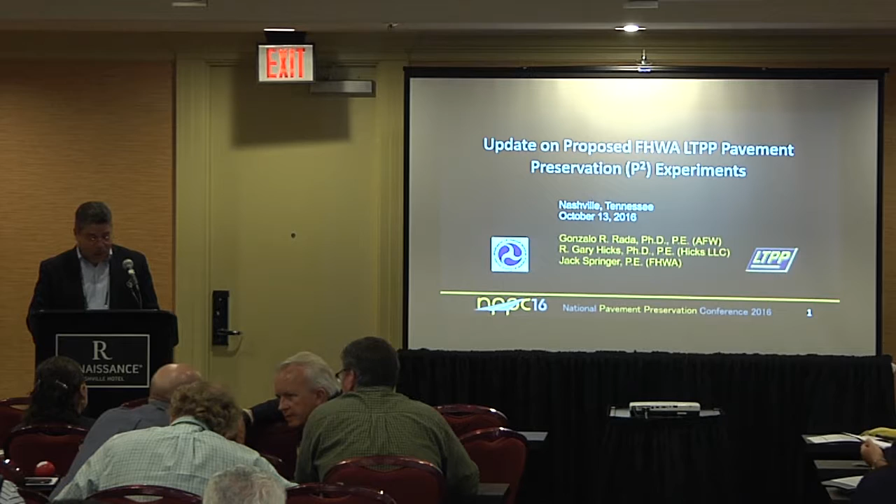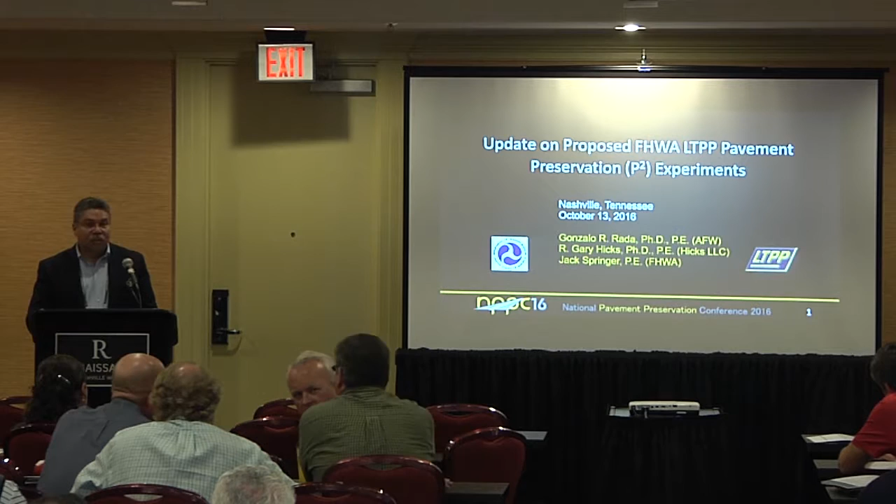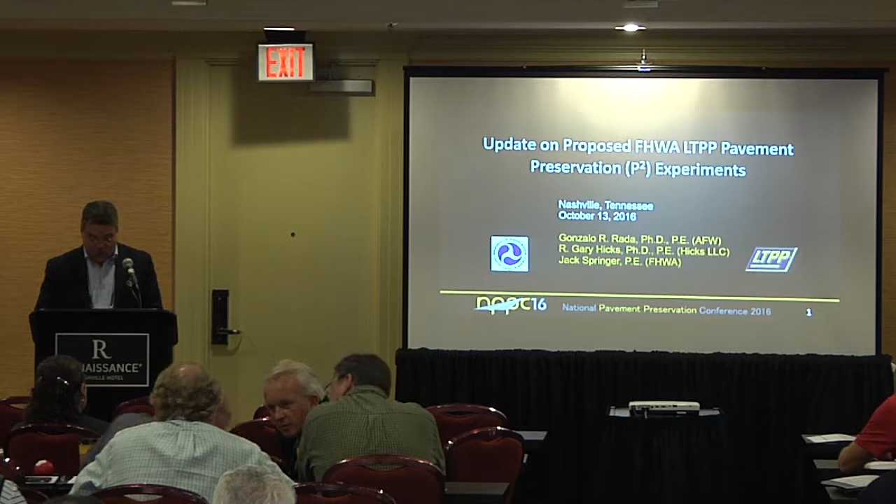The Federal Highway Administration is in the process of developing a series of experiments that will also evaluate the performance of different pavement preservation treatments. To give us an update on the status of these experiments, we have Dr. Gonzalo Rada from Amec Foster Wheeler. Gonzalo is a senior principal engineer with that consulting firm. He has served as principal investigator on numerous pavement research projects, including 3 ongoing pavement preservation studies, one NCHRP project 1433 that deals with pavement performance measures that consider the contributions of preservation treatments. There's another NCHRP project 1438 that is a guide for timing of asphalt surface pavement preservation, and the study with Federal Highways that is for the design of the pavement preservation experiments for the long-term pavement performance program. That is basically the topic of his presentation. So with that, please welcome Gonzalo.

Yeah, that works. Thank you, Luis, and a very good afternoon. Sorry, I'm being too loud. Very good afternoon to all of you. It's a real pleasure for me to be here at this conference to give this presentation on the LTPP pavement preservation experiments.

Before I get going with the presentation, I would like to acknowledge a couple of key project members who helped put together this presentation. First one is Gary Hicks. I believe most of you know him quite well. I think he's playing hooky this afternoon, so I was hoping he would be here to help out, but obviously not. And then Jack Springer, whom I also believe you know quite well. He is here to help out, so thank you, Jack. I also want to acknowledge and very much thank the members of the expert task group that were set up for this project. They have basically been providing us guidance from the start. They've reviewed and commented on everything that we've produced. A number of the members are here, Ben, Jim Moulthrop back there. Am I missing anybody else? Anyways, we've had a really good group of experts helping out along the way.

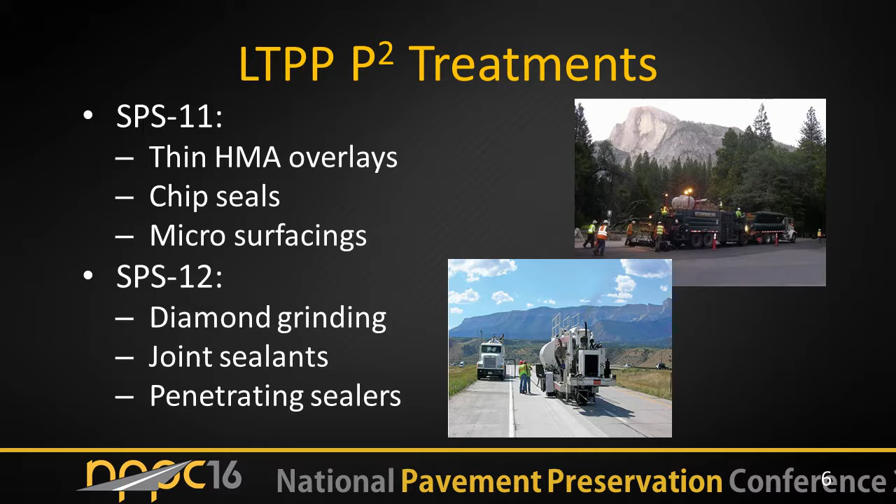So we have a control section, which is very critical for many reasons, but then we apply the treatment at year 0. Year zero means when the project is implemented within the LTPP program. Then 2 years later, you do the exact same treatment on a different section. 4 years after the project goes into LTPP, another section with the exact same treatment.

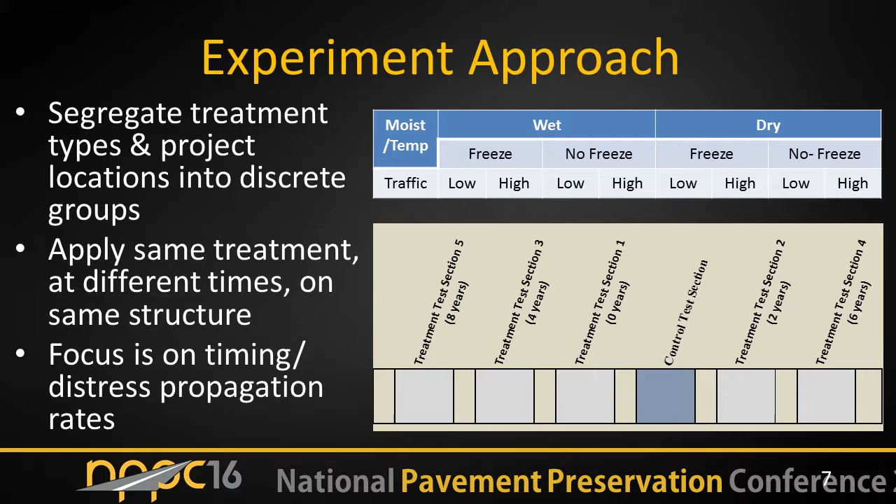So in essence, we're applying the same treatment, not at the same time, but at year 0, 2, 4, 6, 8. That's sort of what we like to do, but that obviously is going to depend on the distress propagation rates. If they're high, we can reduce the timing; if it's slow, we can open up the spacing. The idea is that we're really focusing on timing relative to the distress propagation rates, and we feel that information would certainly complement, perhaps supplement, a lot of the work being done in studies like NCAT and MnROAD.

So that's a bit of an overview of the experimental design. In terms of deployment, basically the first element is construction of the test sections, and here there are a number of elements that were put in place. A set of nomination guidelines were developed to basically help with the nomination and acceptance process.

Those guidelines contain agency participation requirements, which I'll detail in the next slide. They have selection criteria, which I didn't talk about in the experimental design. Perhaps I should have, but we're really being a little bit narrow on what we're considering.

In the case of the asphalt preservation, the only pavement family we're looking at is asphalt overlays over existing asphalt pavements that are in good condition, that are fairly new, the overlay. In the case of concrete pavements, we're looking at doweled jointed pavements. So those are the sorts of things we have under the selection criteria.

And then, of course, we have nomination forms that the regional support contractors will help the agency complete and move along the entire process.

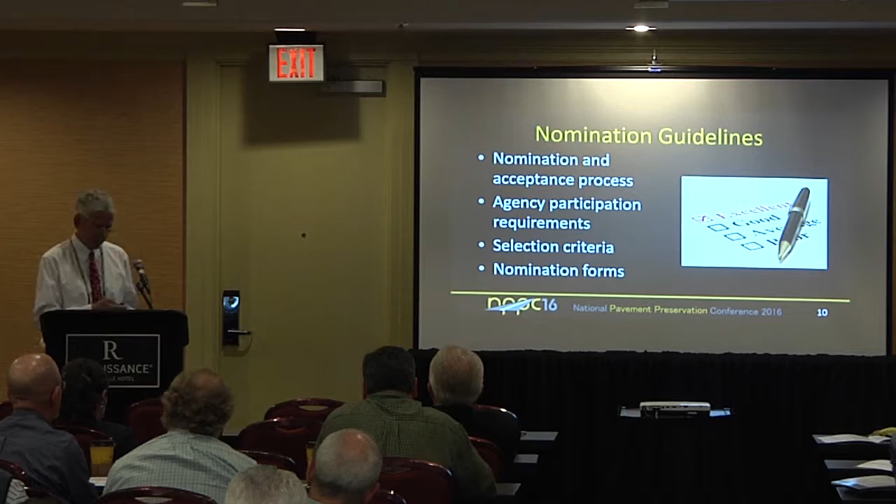Here's a quick summary of the agency participation requirements. These are basically exactly the same things that the state DOTs are doing right now in support of the LTPP program: providing information about the project, when it was constructed, the cross-section, etc., preparing plan specifications, and actually constructing the test sections.

Signs and markings, help with the material sampling and drilling. The testing would be done by an LTPP lab contractor. Traffic control for performance monitoring, whether distress surveys, deflection testing, etc. And actually provide traffic data.

That's probably one of the more difficult ones. I'll go back to what sort of traffic data we are looking for. And then certainly keep Federal Highway informed as to what sort of maintenance activities or any other activity are affecting the project in question.

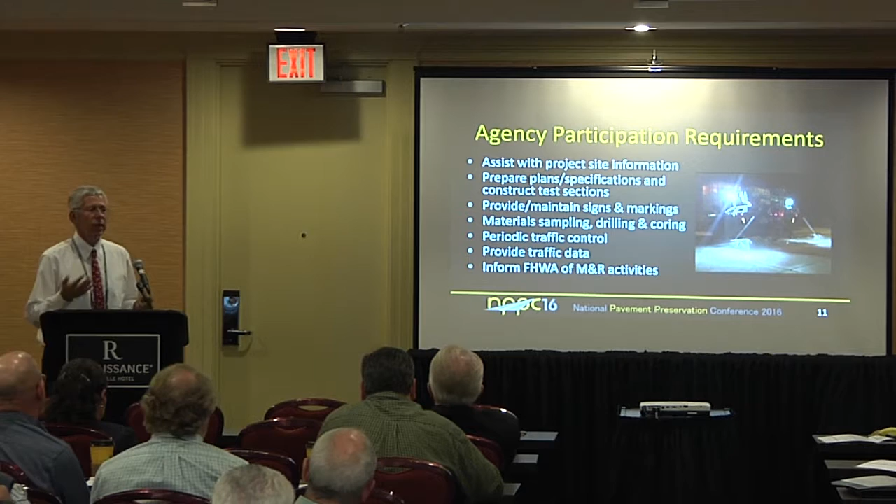In terms of construction, we recognize that, and this was brought up in the previous presentations, that in such a study where you're applying treatments every couple of years, every 1 to 3 years, or perhaps more on the concrete side, you could have contractors changing, materials changing. So there could be a lot of things changing.

So although not originally envisioned as part of the development of the experiments, one of the things we decided was critical was to have a good set of guidelines to construct the projects, and also just as important, just-in-time training, not only for the state DOT and the contractor, but also the LTPP people involved in the data collection. We felt this was critical.

Now, fortunately, there is a lot of good guidelines out there. A lot of people here have been working on this, Jim, I know you have. There are a lot of guidelines out there, and there is a document that contains the recommended guidelines already in place. The only one where we're a little weak and trying to improve is the penetrating sealers, and I believe Gary was touching base with Michigan DOT personnel, where a lot of this is being done.

So anyways, we recognize there will be variability because of the time nature of the experiment, but we feel that with these guidelines, and LTPP is very good in documenting just about everything, the negatives are far outweighed by the positives.

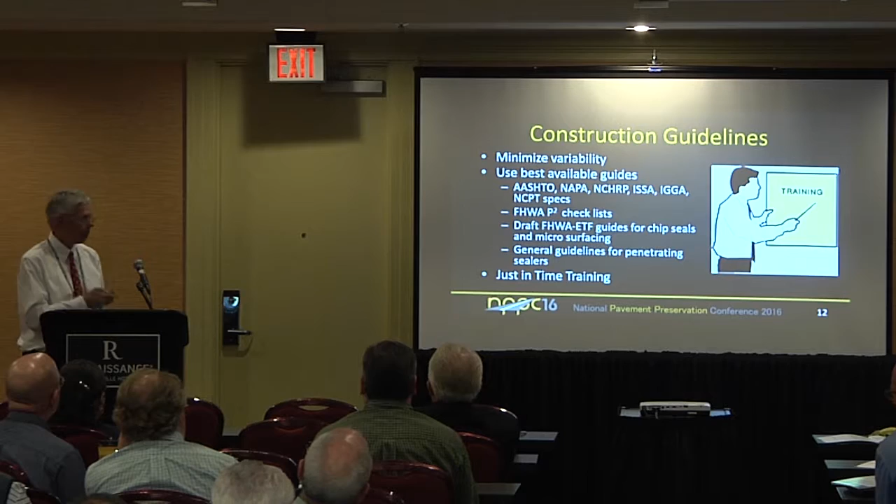So those are construction guidelines. Once the projects start being constructed, there's a lot of information that needs to be gathered, and that's basically broken up into these three categories: before construction, during construction, and after construction.

Again, these are a set of documents that have been prepared in support of deployment of the experiments. There's a whole set of data sheets that need to be completed by the LTPP regional contractors. This is important information in order to understand how pavement preservation contributes to the performance of the pavements, how they perform, why they perform as they do.

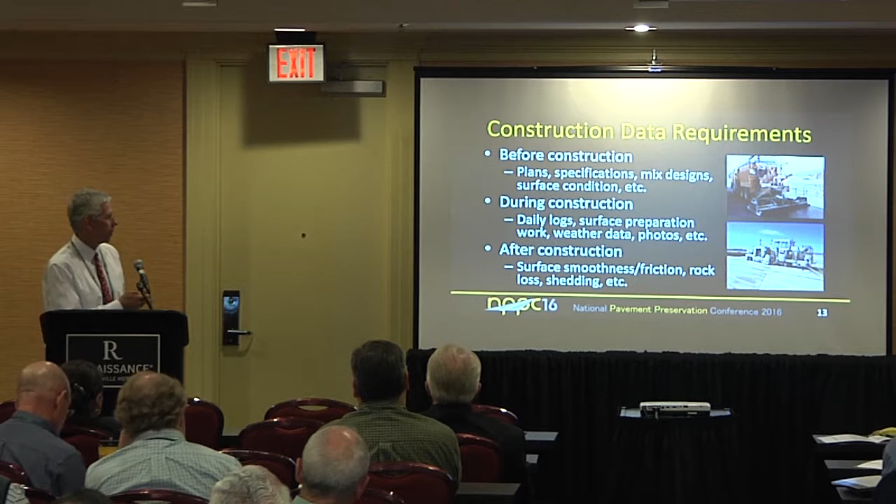Something very important too, there's a lot of things that can go into a database, and it will go into the database. But another thing Federal Highway felt very strongly about is having a construction report for every single project that gets implemented.

And basically what you're looking at here is the requirements for those reports. Again, there are guidelines set up for doing this, but these are things that may provide information beyond the data that goes into the database.

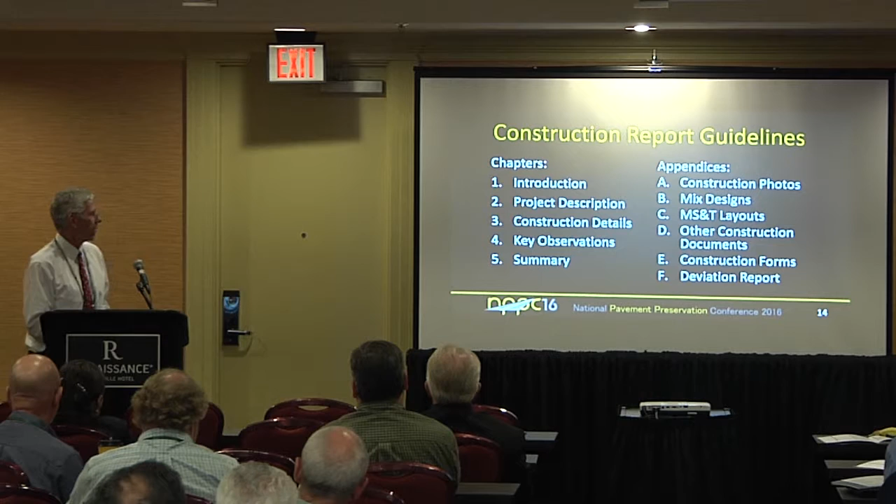Things like deviations, which do happen at projects. It's important to have that documented so that the analysts of the data understand what's going on, what happened, why there were deviations, et cetera.

Okay, so the test section is constructed as it's being constructed. A very important element in understanding the performance of the pavements is materials data: the subgrade, the base, the surfaces, and the preservation treatments.

So again, a number of documents, two documents to be more specific, have been prepared that address the material sampling and testing requirements. We want to be able to characterize every single layer in the pavement structure as well as the preservation treatment itself. So it's not just the preservation treatment, it's going down to the subgrade all the way to the top. In addition, another very important element of this material sampling and testing plan is getting materials to send over to the materials reference lab, so that in the future, if new tests are developed, those materials can be tested and provide the bridge, which is so critical in doing so.

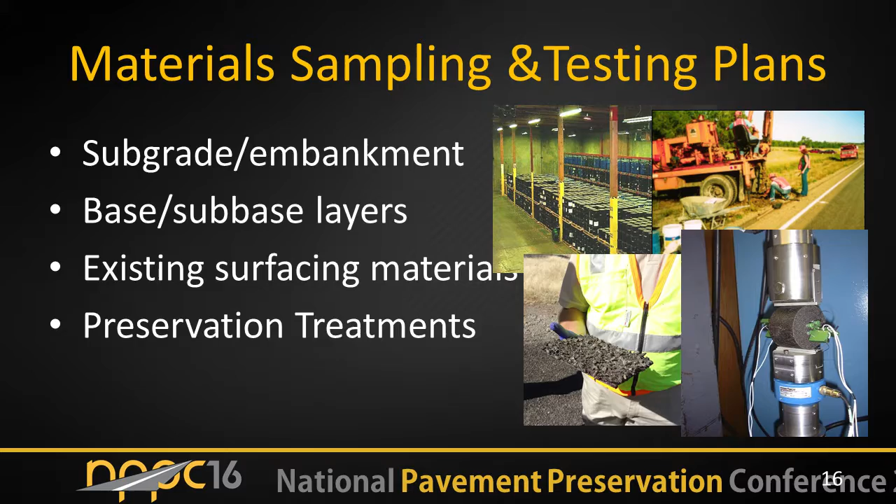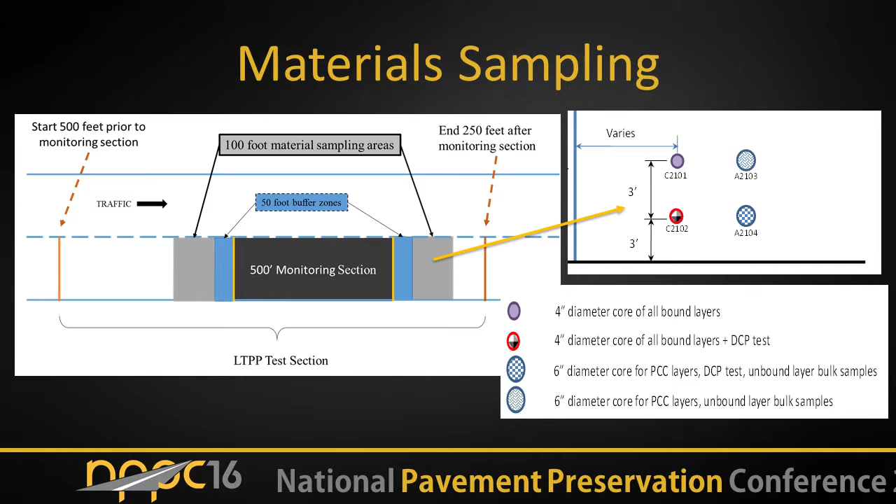And then there are the transition zones. The typical LTPP test section is about 1,250 feet, which means a typical pavement preservation project, if you need 6 sections, is going to be about 1.5 miles. Hopefully that 1.5 miles is fairly uniform, with no traffic entrances, etc.

Threw in a couple of slides just as an example. These are typical tests done on the subgrade soil: sieve analysis, Atterberg limits, classification, Proctor. We do have resilient modulus, which is perhaps the more expensive one, and natural moisture content. So basically the same set of tests that we have for every single layer, for every test section in the LTPP program.

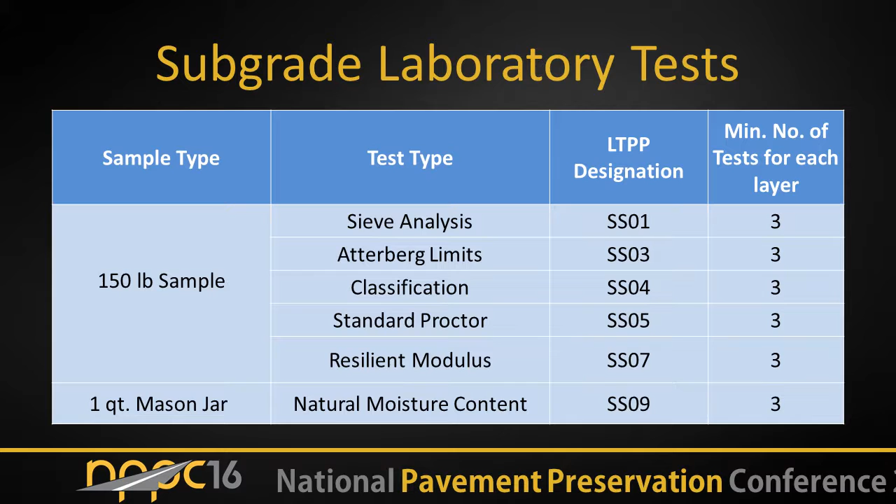Chip seals, even though this is something included in the pavement preservation experiments, has been applied at many LTPP test sections already. So there are a lot of tests in place, and these are some of the things being collected for chip seals.

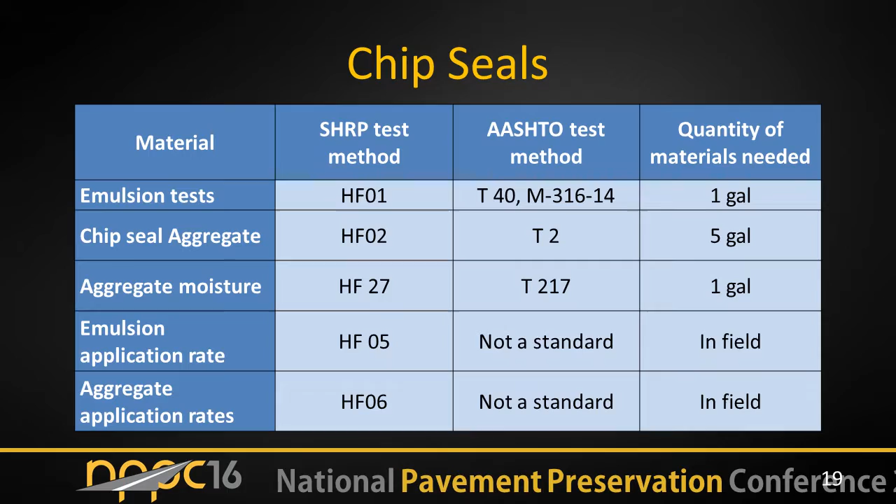We do require a few new material tests which are not currently part of LTPP testing, and I've tried to summarize them here. In the case of the asphalt preservation studies, we're looking at the WRI sampling and testing procedure for aging, and this is where I was hoping Gary Hicks would be here to help out, and also the field Vialit test.

In the case of the concrete treatments, some new tests for LTPP will be the Mohs hardness test, and the Texas Transportation Institute camera test. This is basically a camera put into the joints on concrete pavements to look at the condition of the joints, what sort of condition they're in.

Also from Texas Transportation Institute, we're looking at a permeability test for when we're examining the joint sealant experiment, to see whether water flows through the joints or not. Is the joint sealant working? That's going to be very important in the experiment.

And the joint damage test, this is something that is being worked on. Again, I wish Gary Hicks was here. It's not quite ready yet, but it should be ready soon, and it's something we hope to incorporate into the protocols.

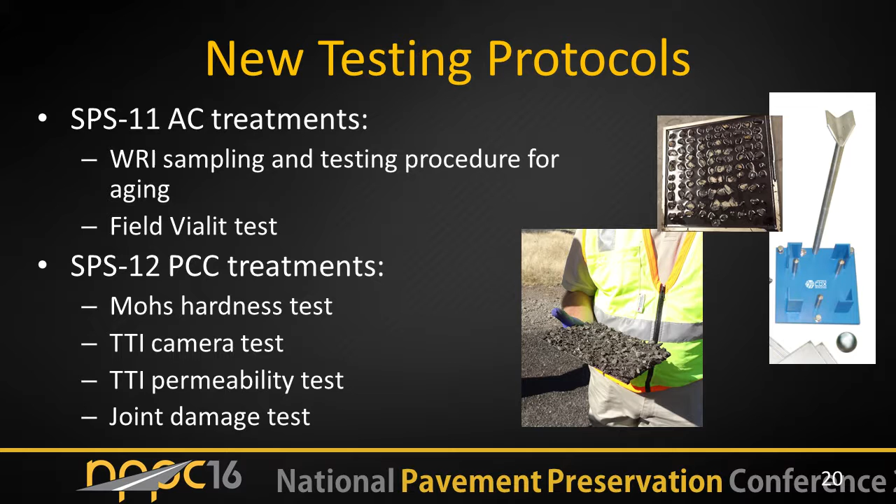Okay, so now we've got information about the materials and about the pavement. There are a couple of additional sets of data we need to characterize, and I'll go through those fairly quickly. Deflection testing, distress surveys, profile and surface texture have been done for LTPP test sections since the start. They're nothing new, and we plan to continue those as part of the pavement preservation experiments. I'll give you some details on frequency, protocols, etc. in just a second.

I've added joint condition surveys. We do joint condition surveys right now as part of LTPP testing, but I included this one here because we are trying to do a little bit more, whether it's the camera at the joints, or the flow at joint sealants, etc.

And surface friction surveys will be important for the preservation experiments. LTPP did do surface friction tests for a number of years. The problem was that it was being done by the states, and there were a lot of differences from one state to another, so it sort of stopped. But we're hoping that for the preservation experiments, we can do this on a routine basis.

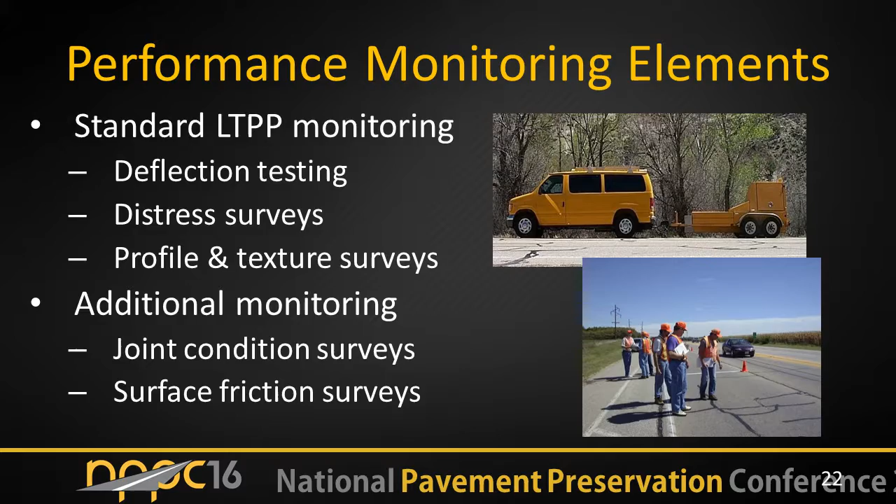Just a quick summary of the sorts of frequency we're looking at. Deflection testing every 3 to 5 years, but before accepting a project into LTPP, we'd like to do some pre-treatment testing to make sure the project or pavements are in relatively good condition. Distress surveys and profile testing both right before the application of the treatment and on an annual basis, etc.

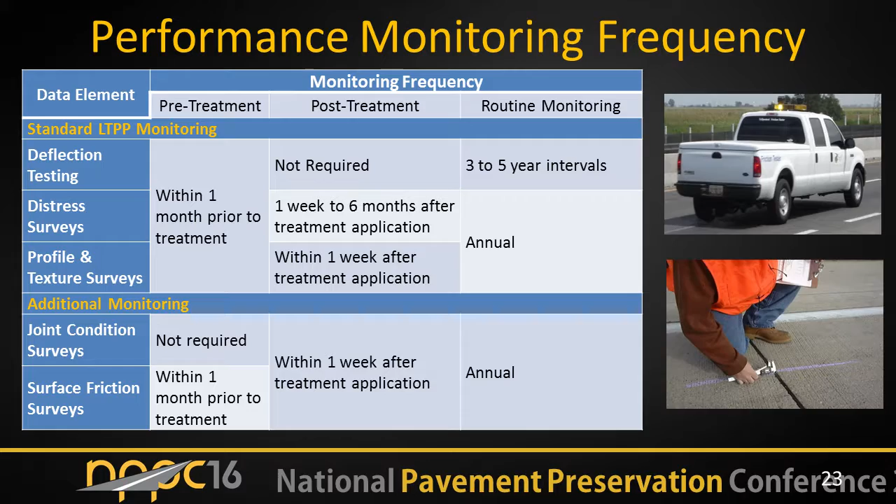Protocols, we have protocols in place, and if not, they are readily available. In the case of friction surveys, for example, because we are looking at 500-foot test sections, what we're looking at is ASTM E2340, which is basically continuous friction survey measurements. So that's what we're hoping for, plus we're encouraging the state DOTs to also perform whatever friction testing they typically do within the state.

The last set of data we need to characterize to understand performance, and why performance is as it is, includes other data requirements like performance. This is a whole separate document unto itself. We do have the standard elements, traffic.

For traffic, we want 3 years of continuous WIM. We feel that will give really the quality data that is needed. However, unlike shown here with the bending plate, what we're looking for is quartz piezo cables.

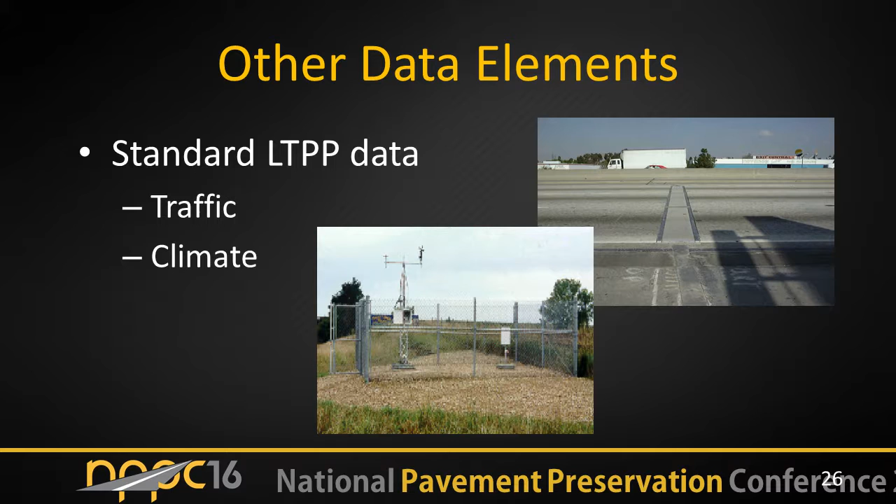For the WIM system. In terms of climate, unlike other SPS projects, we don't see the need to install weather stations. There are 2 approaches LTPP is using right now for weather data. One is the formulation of a virtual weather station based on nearby first order and perhaps even second order weather stations, and there's a lot out there. Perhaps even better now is MERRA data, satellite data, which has incredible resolution and provides incredible climatic data. LTPP is already doing this.

In terms of other data elements, we like what NCAT is doing a whole lot. We feel in the case of asphalt treatments, one of the reasons most treatments are applied is to prevent moisture from entering the subgrade, into the pavement structure. So we feel subgrade moisture is a requirement, something that needs to be looked at.

LTPP did use TDRs for many years as part of the LTPP seasonal monitoring program. There are issues, so we are seriously looking into the ASTM standard with the application of tubes as being done at NCAT.

Snow removal and de-icing data — Ben talked about the importance, especially in areas where you have treatments, of snow and ice removal. And then the last thing to point out here is ground penetrating radar and MIT Scan-2.

We would like to do this before a project goes into the LTPP project. We want to make sure, because it's a time approach, that we get sections in fairly good condition that will deteriorate over a period of 8, 10, 15 years so we can capture that. So it's important they start in fairly good condition.

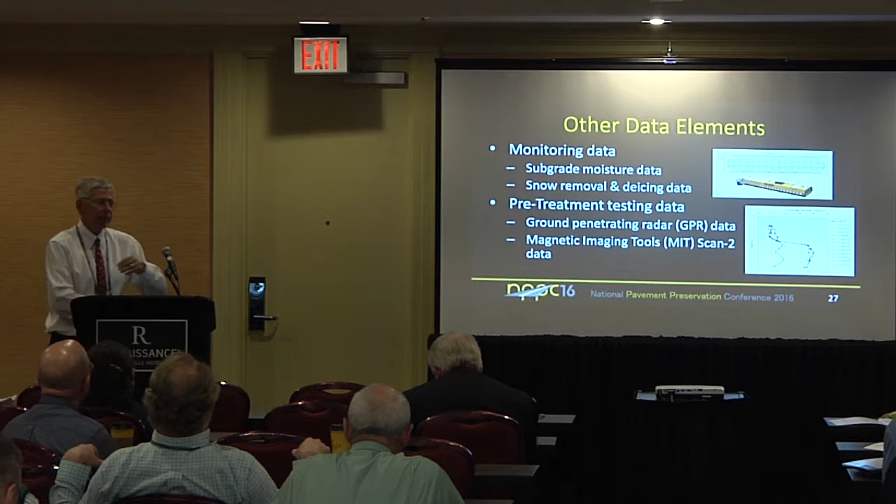Since I'm running out of time, I wanted to get quickly to this third and last item, the path forward. We're in the process of finalizing all of the documents, and there are a lot of them — just about every slide I presented, or every 2 slides, is a document. Those are being finalized; they're undergoing final review and should be ready this year.

The next item, which will be done by Federal Highways, is pursuing funding mechanisms. I'll get back to this on the next slide, but that's going to be very important in terms of the implementation of these experiments.

Assuming that issue is addressed, the next logical step is the recruitment and identification of projects. We're hoping that starts happening in 2017, the second half into 2018, and then to actually implement and begin monitoring by 2018.